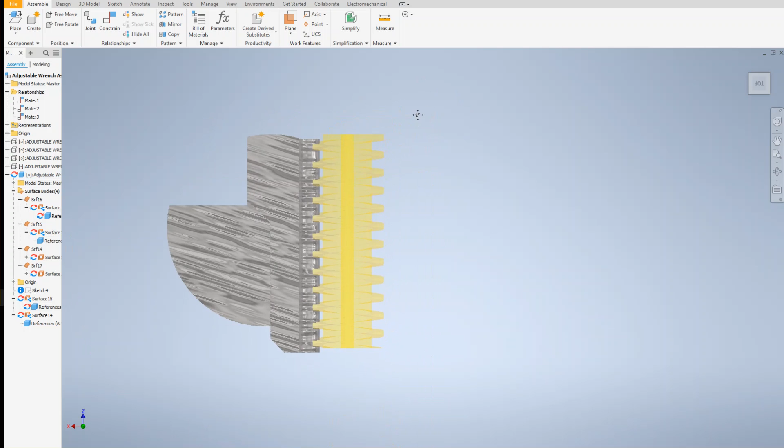I'm repeating, this is the purpose of this procedure: this attempt is to subtract the thumb wheel, leaving the marks on the bottom jaw. Now, that is the general strategy.

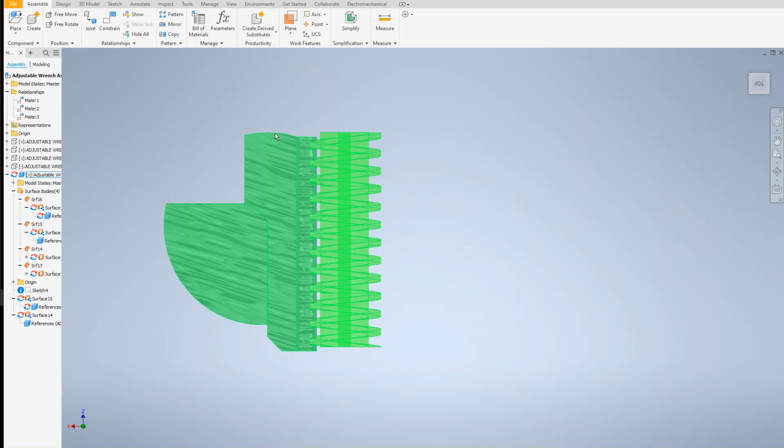The strategy will be enhanced later on, because when you subtract something, you get exact dimensions left on the main part. So at the end of this procedure, we're going to lose the image of the thumb wheel, but we're going to have the bottom jaw left with the indentations on it, and those indentations will be the exact size of the thread.

Unfortunately that's not good enough. If something is the exact size of something else, they don't nicely fit in. So what we need to do at the very end is slightly enlarge, like maybe 0.1 millimeter or whatever, those holes. Because in the world of mechanical engineering, anything that is the same size is not likely to comfortably fit.

For a comfortable fit, you have to put a bigger opening for the part that's going to fit in. So we're going to do that later on, and that procedure is relatively simple and painless. But I just want to show you how Inventor suggests we create a subtraction of the solid from a solid.

So once you put all 4 different thumb wheels on top of each other in place, you need to constrain them. What kind of constraint would you use? You would use the mate constraint, and mate constraint basically mates from the center holes at the center.

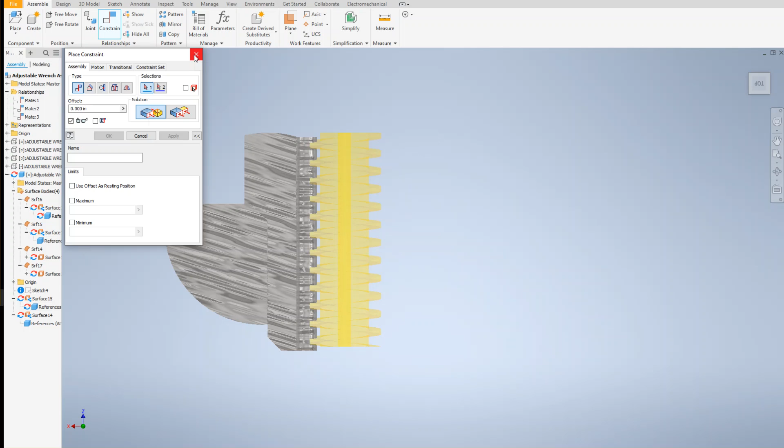I put them all together, and then later on, I'm suggesting you use a copy command. Now, how do you copy something? First of all, this is an assembly drawing. You generate an assembly, with the piece and everything aligned the way you like to have it.

The next thing to do is take the bottom jaw and double click it. When you double click the bottom jaw, the computer automatically will open the part drawing of the bottom jaw, and that is done. That was the first step.

Please remember that when you double click, now you're in the part. How do I know if I'm in the part drawing? Because on the top right hand corner there is a return button. That return button, if I press on it, takes you back to the assembly drawing. Right now I have two tabs at the bottom: one is the assembly tab, and the other is the bottom jaw tab itself alone. My current view indicates that I am in the part drawing, not the assembly drawing.

All right, is everybody clear so far? I think it is. So, what is the next step?

Next step is go to Modify and select Copy Objects. When you click on that, the computer gives you a chance—I'm bringing the dialog box in front of you—to copy the surfaces. So click on the surface. This is very important because the surface defines what needs to be subtracted.

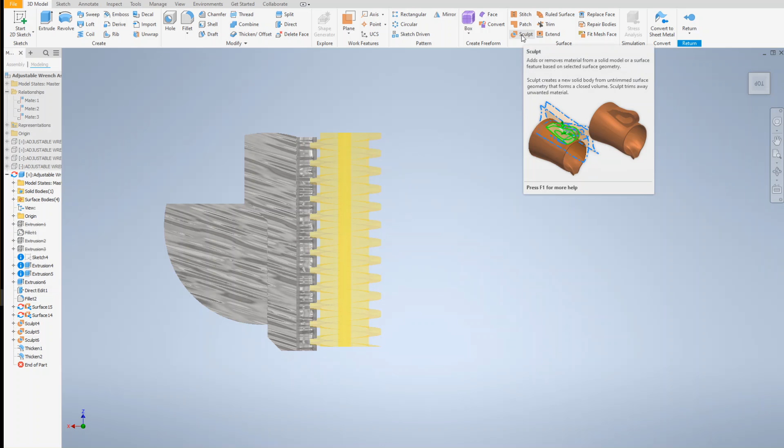So what happened? Now you have the copy of these surfaces, but the computer still does not know what to do with it. The next step is to take it to the sculpt command. Where do I find the sculpt command? Right over here. It's on the top right-hand corner, counting 1, 2, 3, 4, 5, 6 columns from the top right, and horizontally the third item.

When you click on the sculpt command, you want to select this subtraction or remove option. Then you choose one at a time and click OK. One at a time, click OK. And as a result, you're going to have the holes.

So far, so good. Hallelujah. But what do we do with the image over here?

I'm going to go to the browser, select the surfaces, and turn off the visibility. I'm going to click on this one, press the right mouse button, and turn off the visibility.

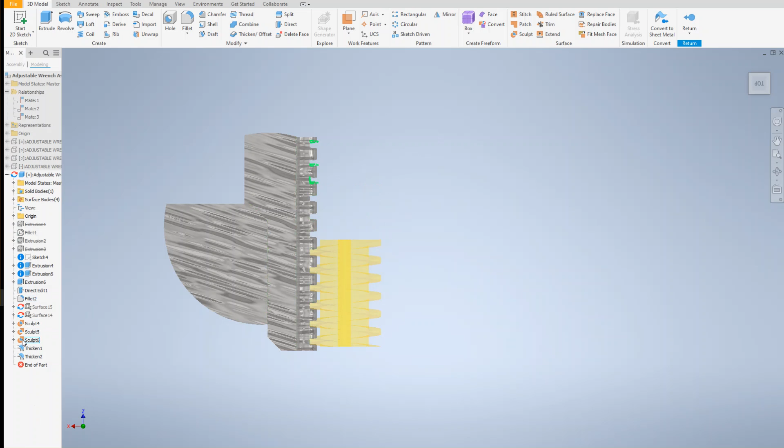I'm going to click and hold on. This is gone, this is gone. This needs to be gone too. Click, right mouse button, visibility is gone. And click, right mouse button, visibility is gone. Now you can see the result.

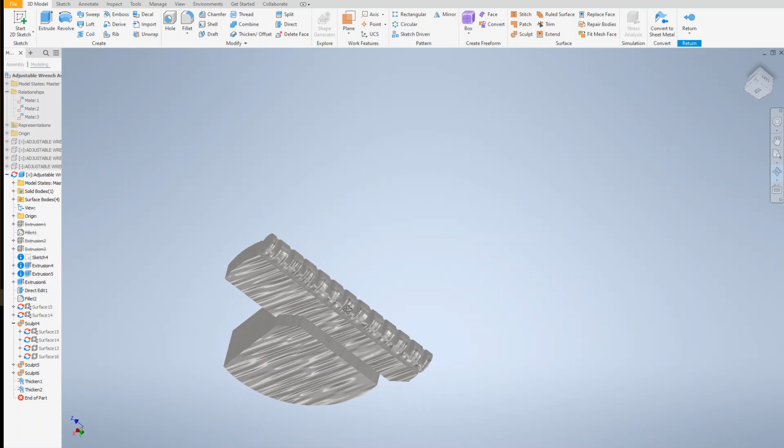This is what you want. This is what you like to have. This is the thread. That seems to be what you like to have, except with a minor difference. This is exactly the same size.

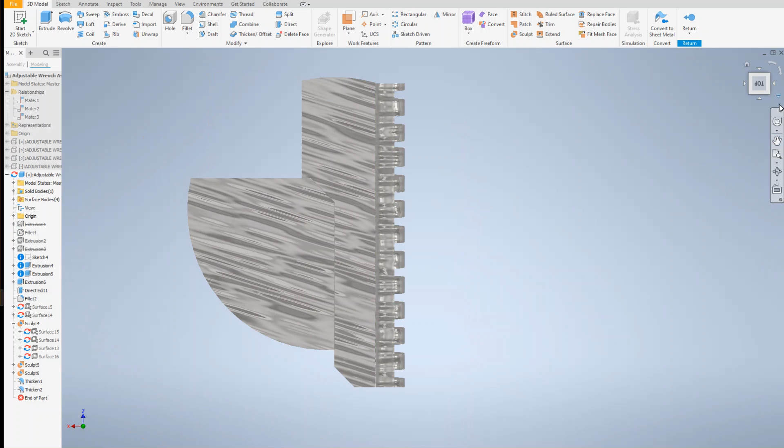What we need to do also is focus on each one of them and enlarge this. So that's a simpler procedure. Basically, you click on this surface, and then there is a command called direct edit that enables you to push down.

So you use direct edit and click on it, and you're going to push this down. How much? Good question.

Instead, I use the thicken command. The thicken command enables me to pick each one of those with the shift button, 0.1 each, away from the center.

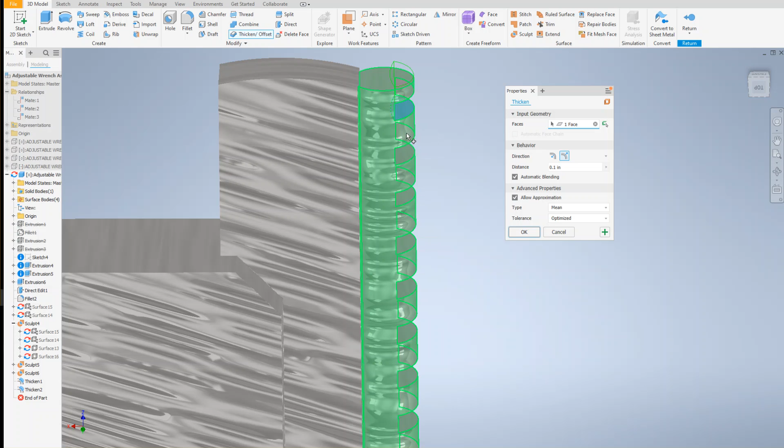I'm going to Control Z this. I'm going to do this one more time, if I can pick it. I'm pressing the shift button at the same time I'm picking the surfaces that I'm going to thicken.

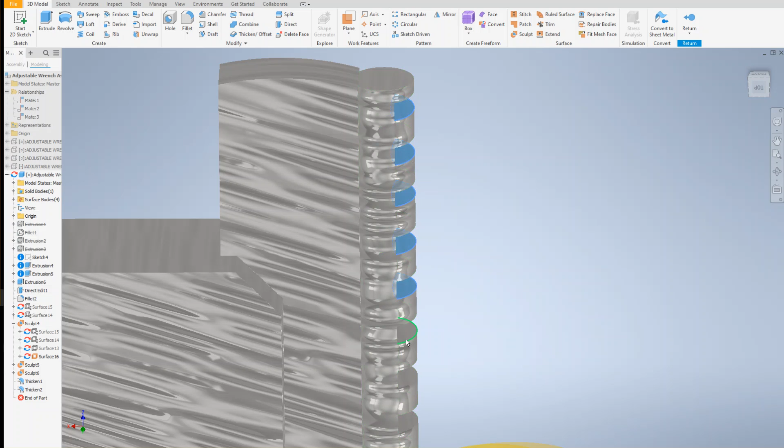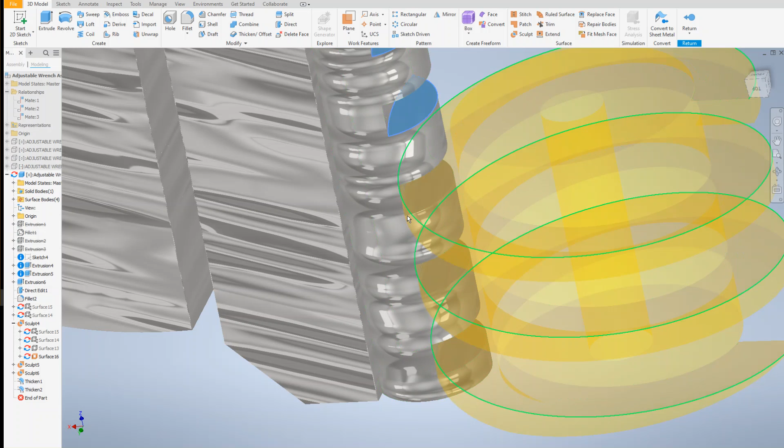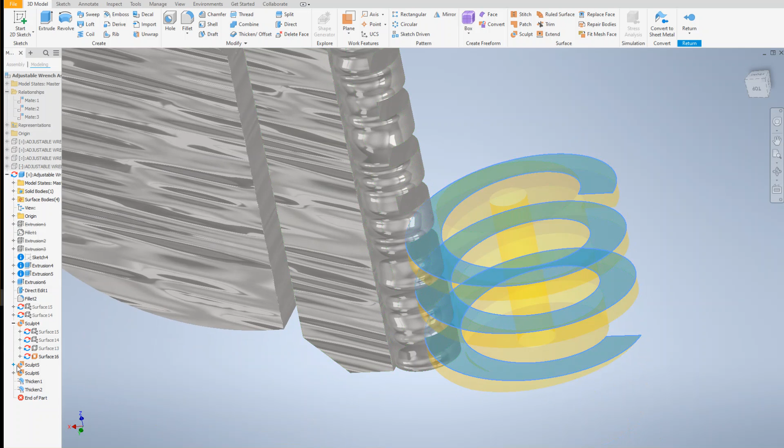I don't know why this is appearing right now. This particular thumb wheel did not disappear. We have to find out which one it is. Oh, this is the one. So I'm going to turn this off.

Good. Now I'm going to go with one at a time. The procedure is basically you choose each one of them one at a time and then thicken in the opposite direction, 0.1 inches. The selection of the direction is important.

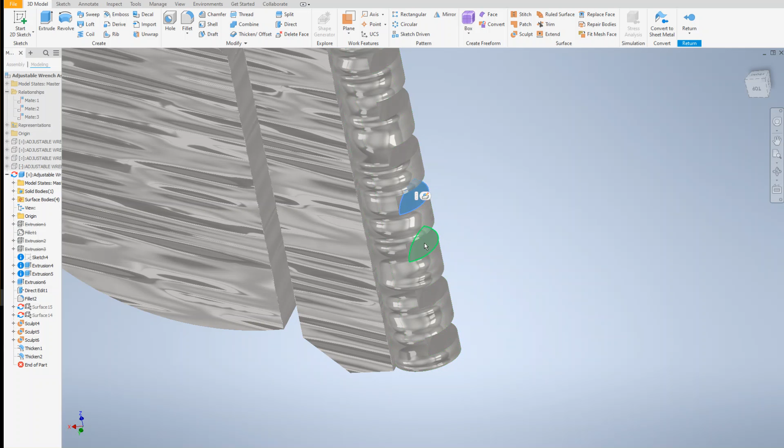Control Z, I'm going to redo this one. Click, click, click, click. Each one of them has to be selected first. 0.1 seems to be too much. It should be perhaps 0.01.

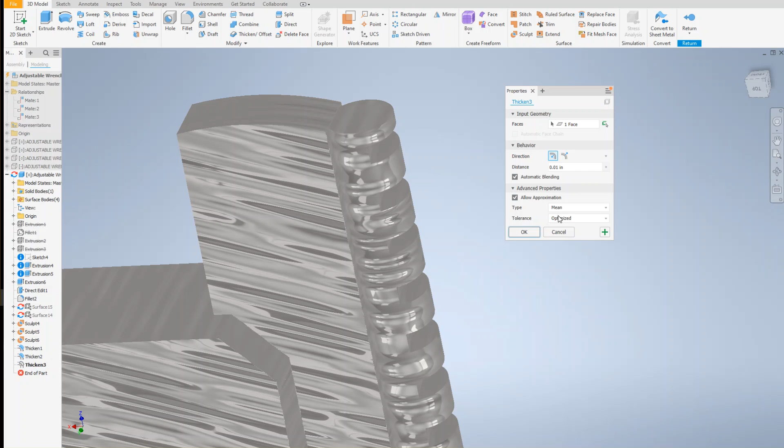So I'm going to go with the thicken option and change the dimension to 0.01. Yes, and now it is thickened. That means there is more room. You can go all the way to 0.02 if you like.

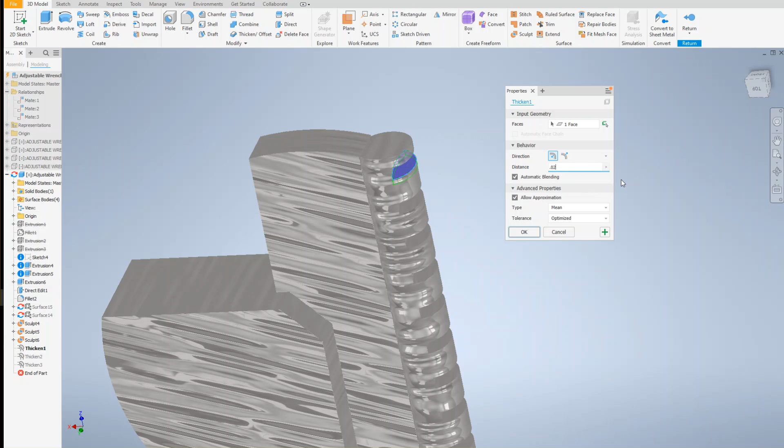There is right now more room, a whole lot more room. 0.02. Okay, for the engagement of the thumb wheel, that's the way it's supposed to be.

This is ready to go, and I'm going to just simply save it. Thank you very much for watching this.

In the next video, I'm going to demonstrate how to assemble everything in the assembly drawing, because the bottom jaw was the most important part of the entire assembly. There is going to be an axle at the center. An axle is simply something I'm not going to demonstrate — everybody can design an axle, obviously.

It's going to be a piece of cylinder, and with the cylinder command, I would suggest you design it on your own — think about it, solve that problem, and show me how you're going to do it. After learning so much about Inventor and design with Inventor, you should be able to do an axle without instructions, but I'm going to demonstrate assembling the parts in the next assembly drawing, later on a different video. Thank you very much. Have a great day.